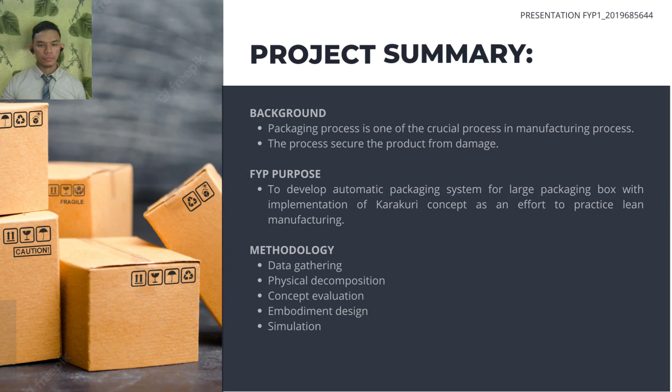There are several main contents for further explanation about my project. For quick understanding, I will go through the project summary.

Packaging process is a crucial process in manufacturing industry where the product is secured from any damage while being handled, stored and delivered. My final year project aims to develop an automated packaging system with implementation of the Karakuri concept to practice lean manufacturing. There are several processes and methodologies involved to design the system, as shown in this slide.

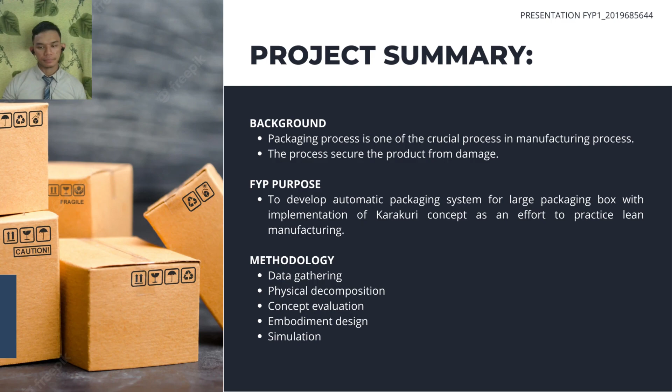For project background, packaging process is an important process involved in manufacturing industry to protect product from any damage while being handled, stored and delivered. Through this project, an automated packaging process system for large packaging box has been selected to be developed with implementation of the Karakuri concept to practice lean manufacturing.

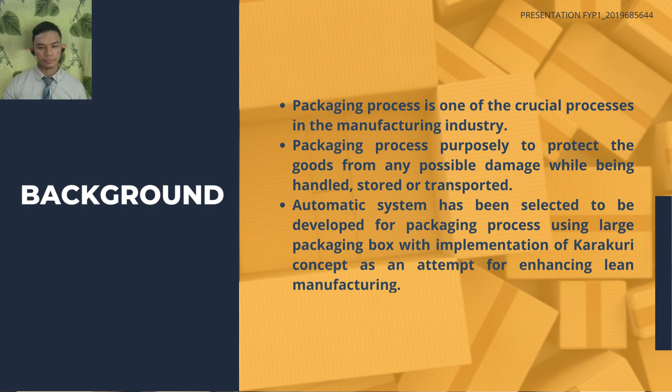This project can lead to achieving Sustainable Development Goal 9, which is build resilient infrastructure, promote inclusive and sustainable industrialization, and foster innovation. This claim is due to implementation of Karakuri in the developed system, since it involves continuous development activities for further improvement. Furthermore, practicing lean manufacturing through this system will maximize resource utilization and reduce risk.

For literature review, I have divided it into 4 subtopics, which are Karakuri, lean manufacturing, Karakuri implementation case study, and packaging automation case study. Karakuri and lean manufacturing need to be deeply understood to optimize them in developing the system, while the case studies are required as reference for related design projects and research gap identification.

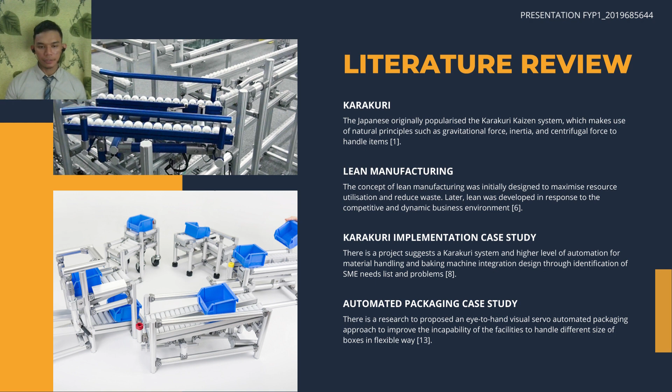This slide shows some content of the literature review included in this project, such as Karakuri making use of natural principles like gravitational force to handle items, while lean manufacturing is designed initially to maximize resource utilization and reduce waste.

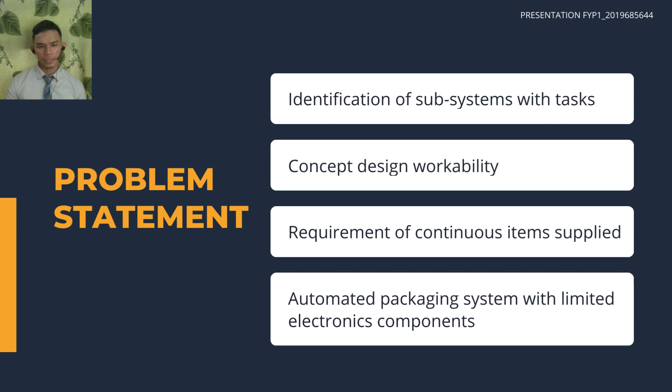There are 4 problems that have been identified through this project, which are: subsystems with their tasks that need to be identified, workability of concept design that needs to be checked, items that need to be continuously supplied due to the automation, and limited usage of electronics components.

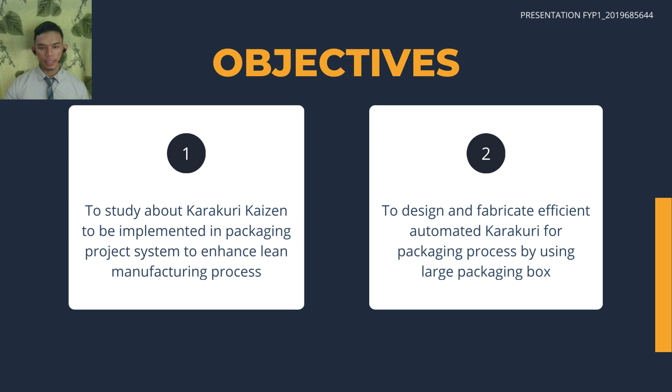The first objective of this project is to study Karakuri Kaizen to be implemented in the packaging system to enhance the lean manufacturing process. The second objective is to design and fabricate an efficient automated Karakuri for packaging process using a large packaging box.

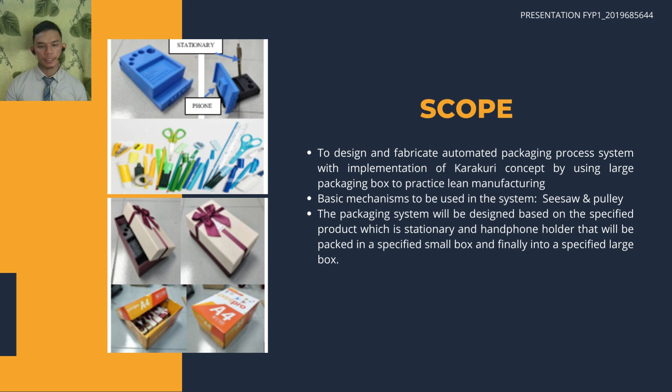The scope of this project is to design and fabricate an automated packaging system for large packaging box by implementing the Karakuri concept to enhance lean manufacturing. Seesaw and pulley mechanisms have been suggested to be used in the developed system. The packaging system will be based on the specified product, which is stationery and phone holder, that will be packed in a specified small box and finally into a specified large box, as shown in the figure in this slide.

There are 3 limitations that have been identified. Firstly, limited space for the system to be developed and tested. Secondly, the cost required for initial investment for this project. Finally, the limitation to do performance evaluation on all concept designs for comparison purposes, since the cost and period are limited.

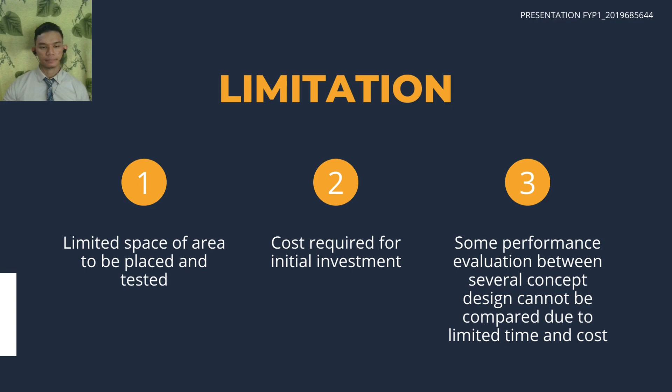There are 5 methodologies involved in this project. The first method used is gathering information to understand the related theories and generate design ideas for the developed packaging system. For theory, academic resources such as articles and journals have been used, while for design ideas, academic resources like articles and YouTube videos have been explored.

The second method is identifying physical decomposition of the automated packaging system. The system is divided into 4 subsystems, which are: large box packaging process subsystem, large box inventory subsystem, subsystem to transfer small boxes into the large box, and electronics components for automation assistance.

The process of how the system will work starts when the small boxes, consisting of the product, are placed at a specified area and then transferred into the large box. If the large box is fully filled with small boxes, it will go through the packaging process subsystem, and finally it will be transported onto a trolley.

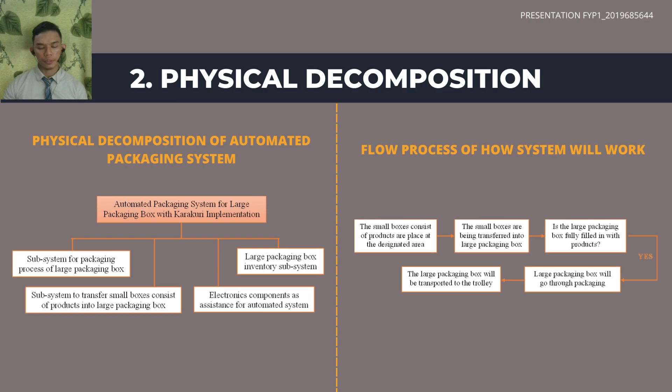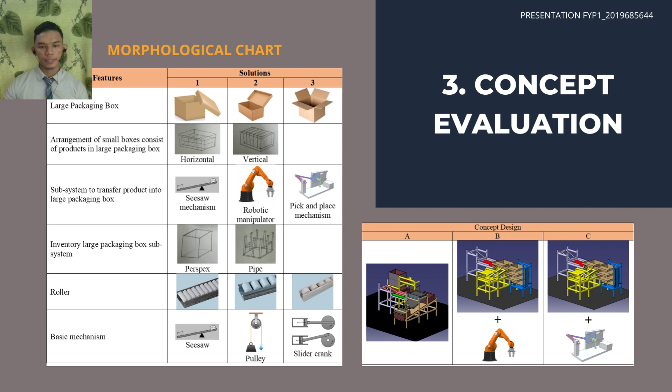Third method is concept evaluation, where a morphological chart has been used. There are 6 features listed in this chart, consisting of a maximum of 3 solutions for each feature. After that, 3 concept ideas have been generated to be evaluated, as shown in this slide.

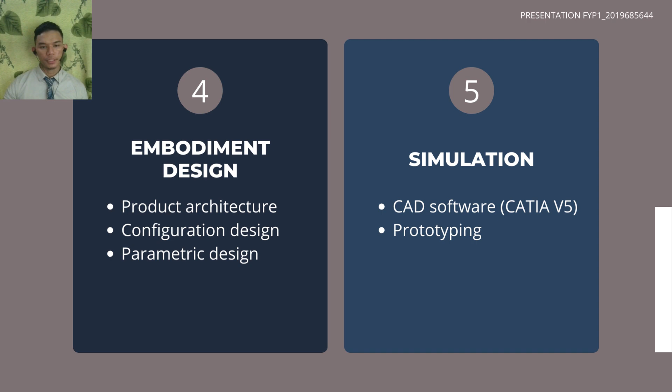Fourth method used in this project is embodiment design, or known as preliminary design, which includes the product architecture, configuration design, and parametric design for the developed system, followed by the last method, which is simulation of concept design through CAD software and prototyping.

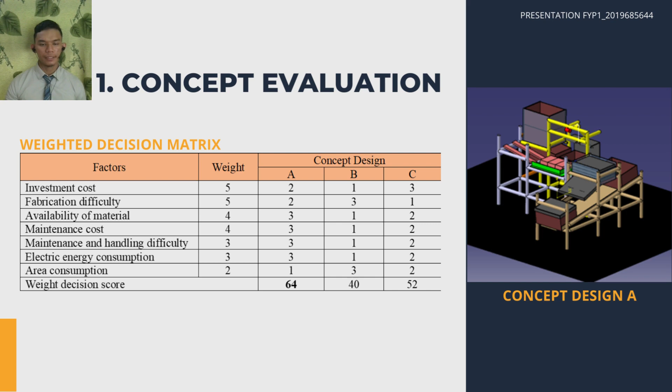In this project, there are 3 expected results, and the first expected result is concept evaluation, where a weighted decision matrix has been used to evaluate the best concept design to be developed. This evaluation results in concept design A achieving the highest score compared to the other concepts, hence this concept will be selected for this project.

Next is the embodiment design. The embodiment design of the packaging system is shown as figures in this slide. The system design consists of a subsystem to transfer small boxes to the large box, colored green; large box inventory, colored blue with a little transparency; subsystem for packaging process of the large box, colored brown; and electronics components, in red color.

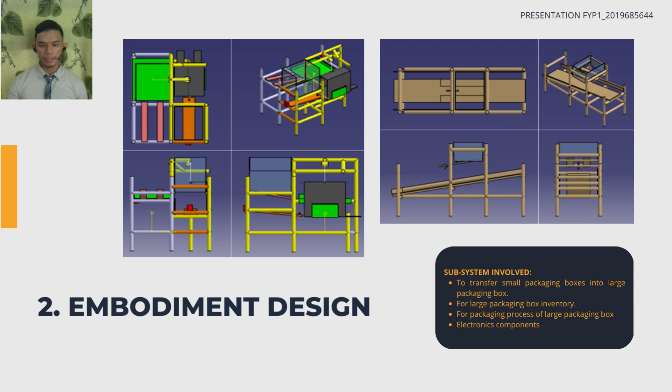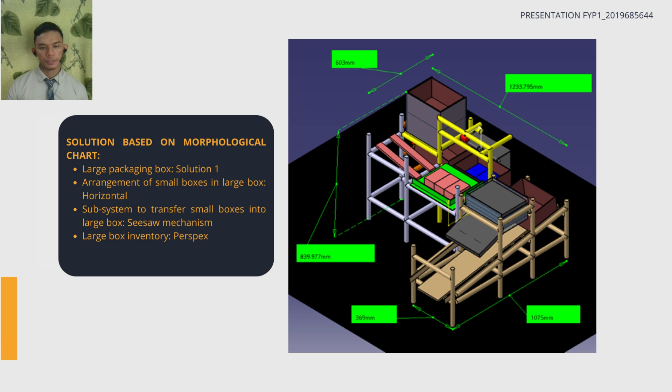The model design shown in this slide is the overall system with boxes, including the general dimensions. Referring to the morphological chart, this design used solution 1 for the large box, horizontal small boxes arrangement in the large box, a seesaw mechanism to transfer small boxes into the large box, and a Perspex for large box inventory.

For simulation, there are 2 simulations that have been used as mentioned in methodology, which are CAD software and prototyping. For CAD software, there are 3 simulations that have been done to demonstrate how the system will work. The first simulation is to show how the large box will be placed at the designated area.

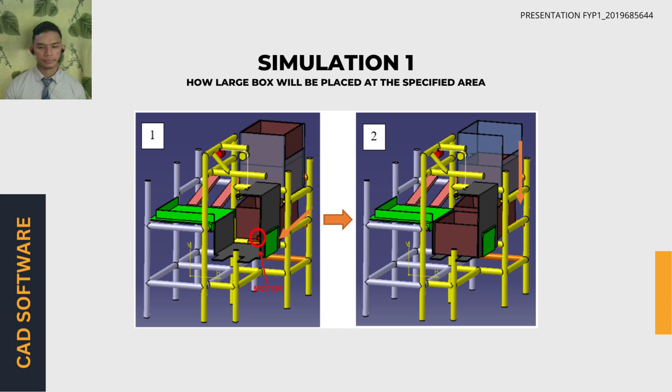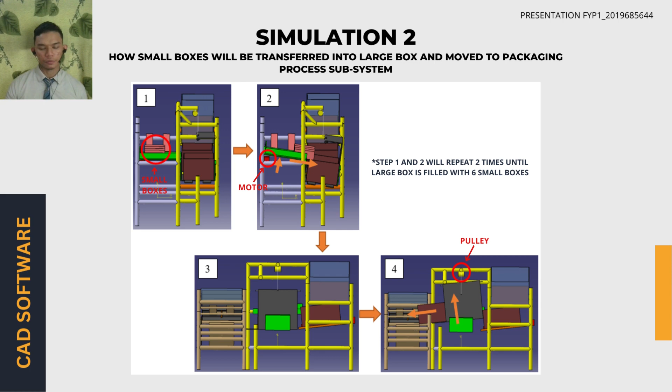After that, the pulley, circled in figure 4, will lift the large box until it hits the barrier to give a decline angle, hence allowing the large box to move to the packaging process subsystem.

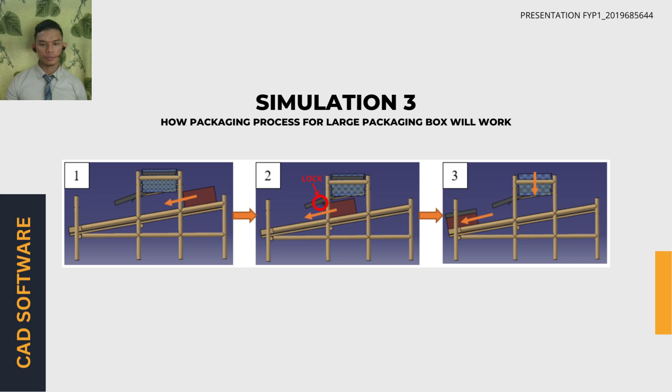The last simulation is to simulate how the packaging process works. The large box will automatically move downward due to the decline roller used in the system. When the large box hits the lock, circled in figure 2, the box cap will be released and allow the large box to move downward with the box cap, resulting in the complete large packaging box.

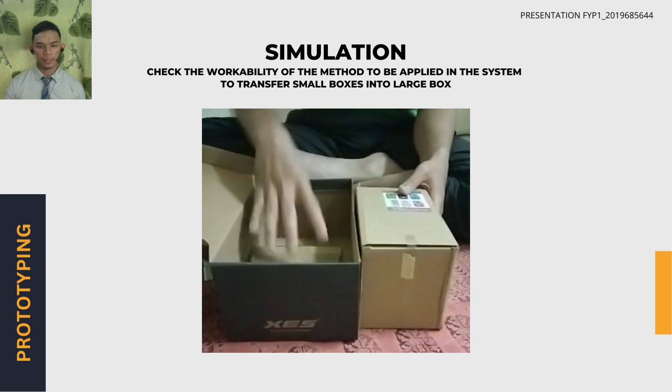For prototyping, there is only one simulation that has been done, which is to check the workability of the method to be implemented in the system to transfer small boxes into the large box.

For future activity, this project will go through a detailed design process, followed by fabrication of the system to complete this project. The next slide will show the Gantt chart and all the references used in this project.